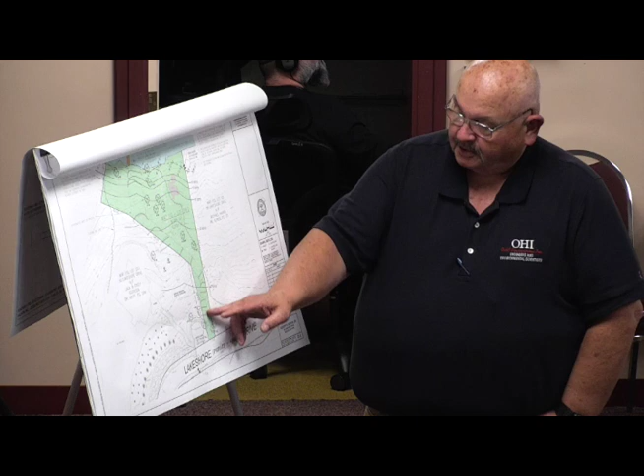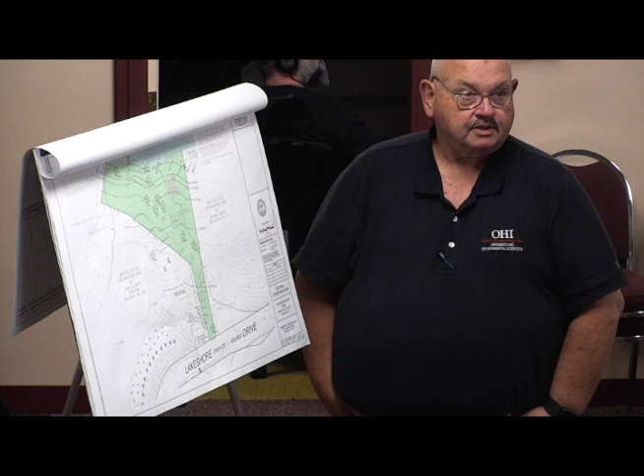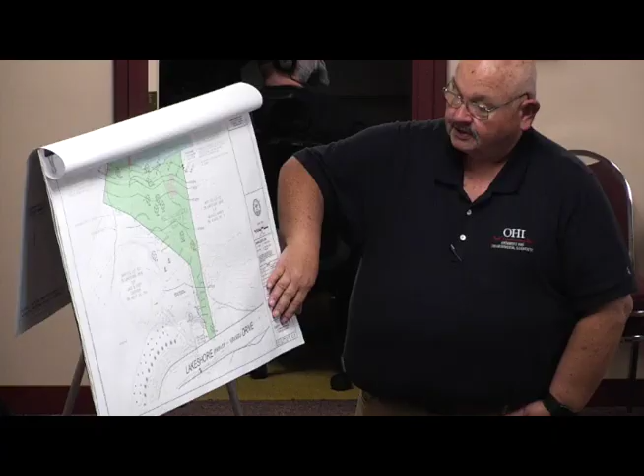The squiggly lines here, those are straw wattles that Mr. Moran had put in to try to slow erosion down. That is the existing condition. The wetland flags here were taken off of the notice of intent plan that was prepared by Gurry and Howland. We did not flag the wetlands. And this topography was taken by us. They're 1-foot contours. The previous was 2 by Gurry and Howland when they did the notice of intent plan for Mr. Goodison. But a surveyor used a scanning device to do the topography, because that would give us a more accurate representation of the ground conditions, especially when you get into nitpicking on how water flows.

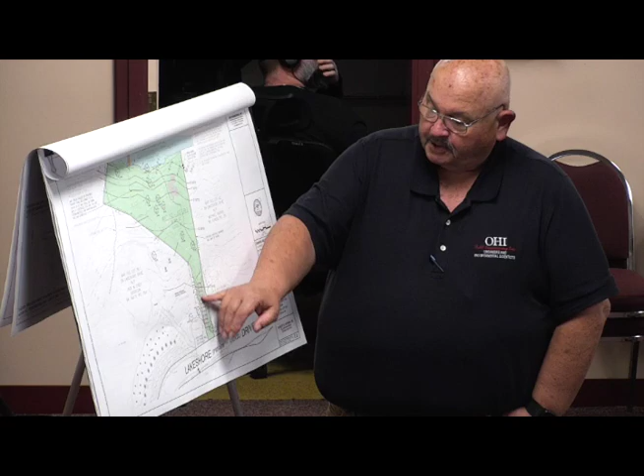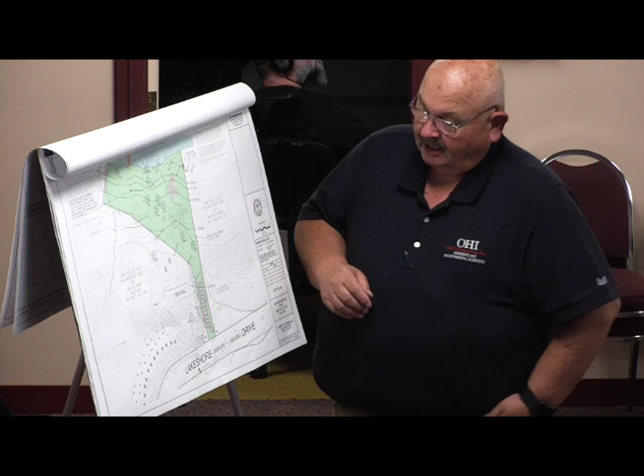So the first drawing is the EC plan. The second one is the site plan showing the proposed restoration. And what we're intending to do is to use a product on the slope here. Turf stone, thank you very much. But I'm old, so I have an excuse. Turf stone is a block, it's 3 inches thick, they run about 16 and a half inches wide, 24 inches long, and they're like a waffle. They have voids in them. And these blocks, you can interlay them with each other to make the roadway. They can either be filled with crushed stone, or you can fill them with loam and seed, and you can mow them like a lawn if you want to, but the point is they're permeable.

They also sit on a bed of stone, and on a slope like this, whether you use angle iron or a little bit of a poured concrete stop here, they recommend a stop when you're on the downhill side of the ramp to keep the thing from moving. I can't see how it would, but, so this starts right here at the edge of the road. This is 40 feet long. It just gets into the 100-foot buffer here by about 5 feet, 4 feet. And then the land flattens out.

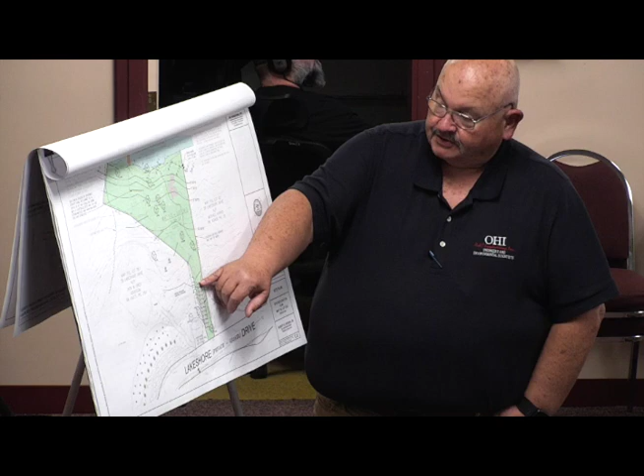Now, Mr. Moran bought all these straw wattles, so what we wanted to do in the restoration was, first of all, we understand the lakes will be drawn down in a couple weeks, is that right? Mm-hmm. And it goes down about, Brandon Phantom told me it goes down about 4 feet. That's the time to remove the material that's in the pond. And I have an outline of that right here, if you can see that on your plans. Yes. So what we proposed is, with the ponds down, remove that material, stockpile it somewhere on the site, and then surround it with some kind of a silt area so that nothing can get washed in a subsequent rain event.

Unfortunately, this is the wrong time of year to try to stabilize a site. No one's going to get out there and get this work done in time to grow any kind of grass or anything, so I think it's going to have to wait till spring. I would suggest that. I told my client I didn't think anyone could do it any sooner.

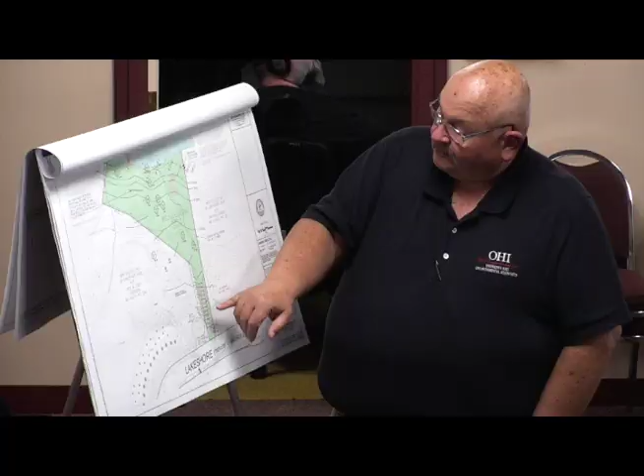But I also have on here, starting at the 100-foot buffer, right here, we have a dash line coming down the property, running over to here, across the pond, in and out of the wetland flags, and then back up here, outside of the 100-foot buffer again.

We proposed mulch wattles. They work a lot better than straw. When they're wet, they settle right down on the ground, you stake them in. Not much gets by them. It would offer a lot more protection to the pond than the straw wattles would, or even hay bales, I think.

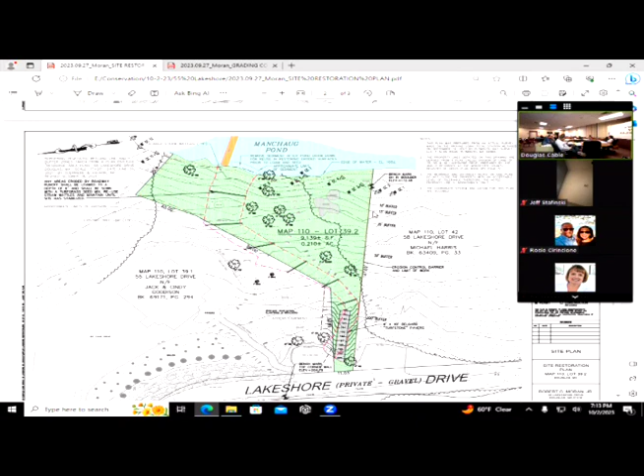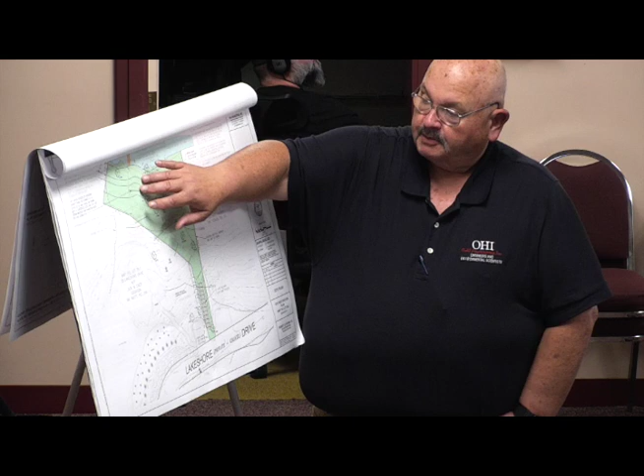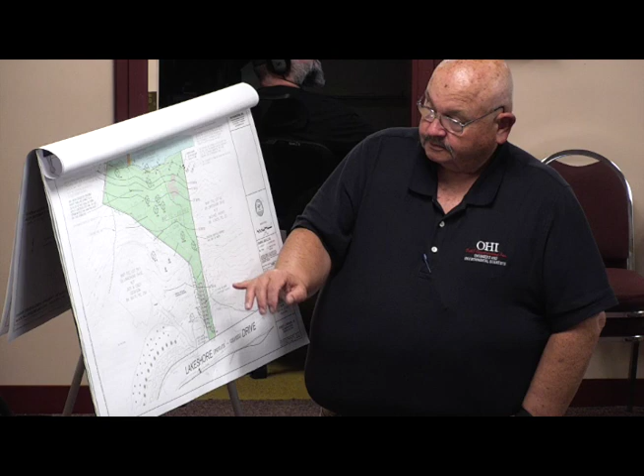I'm assuming in the spring, when we can work with the grass, the stockpiled material, we could reuse that material to restore. There's ruts in the driveway area coming down here, and there's just material missing throughout here. That material could be spread, be loamed over and seeded, and could reestablish the lawn that was there.

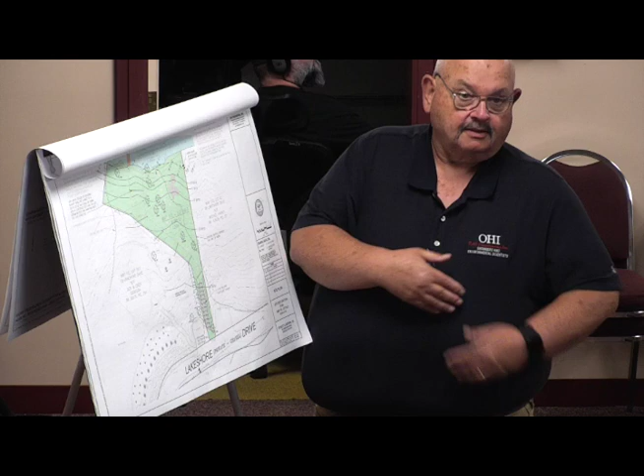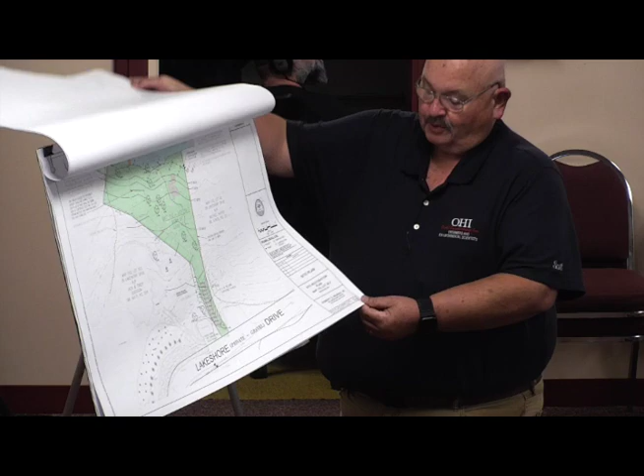Unfortunately, none of this is going to work until we solve the problem with the water, because no matter what we do, if the water keeps coming down, it's going to continue to wash away. There's one more sheet. I don't know if there's a need to talk about it. It's just standard. Do you have a construction sequence somewhere on the site? A construction sequence? There is a construction sequence on there. It's a general one that we use.

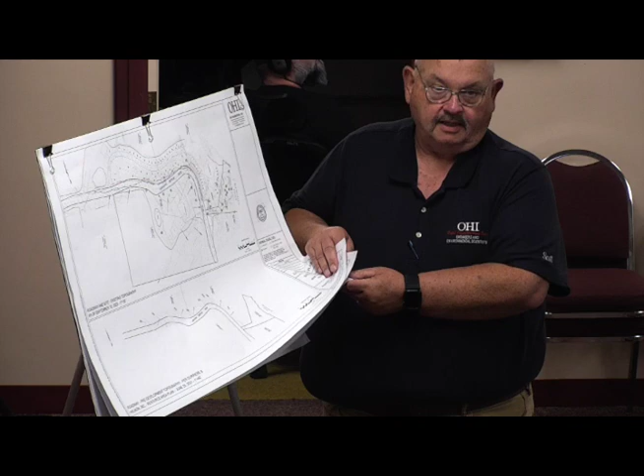Now, there's not a notice of intent or anything here. Is this something you can still condition as a commission? Yes. Okay, that's good. Within that enforcement order. Yes. All right, this plan.

Top view is Lakeshore Drive. This is Mr. Moran's property. This one, I believe, is still owned by Mr. Cahill. This is Mr. Goodson's property, all the way up to here. This is the result of the survey that we had done. There's 1-foot contours that we generated, in an effort to show the actual path of the water flow within the roadway, and that's the blue line. The red line, you can call it a top of berm, you can call it a drainage divide if you like, but the water doesn't get past that red line, stays on this side of the berm.

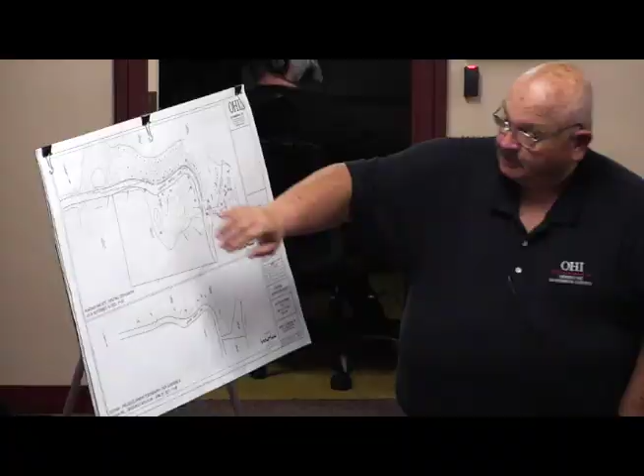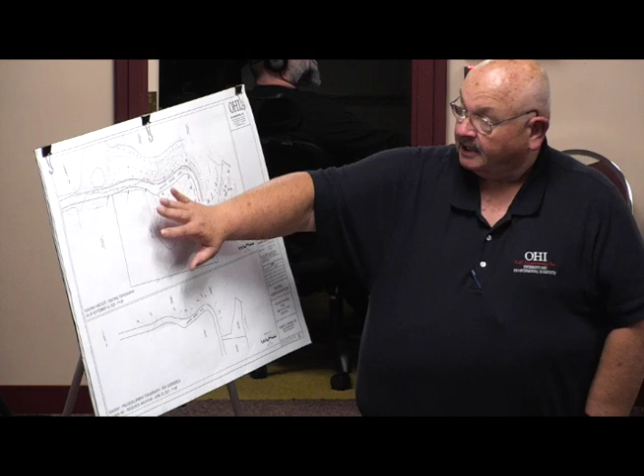So Mr. Moran's property ends here. This lot, I believe, was cleared. I think there's a void of trees here. Anything from this red line going this way in the roadway appears to come down the road and go this way. Okay? Everything from this property here coming down, even above Mr. Moran's property and Mr. Moran's property, all contributes to the roadway, and they have these drainage flow arrows on here.

There is a divide on Mr. Moran's property where the water goes elsewhere, but here it goes toward the road all along the property. There is a substantial amount of upland area that contributes to this. Beyond Mr. Moran's lot, it's probably something like this. It's huge. Because of the berm, the water runs to the roadway, it's channelized, and the further it goes downhill, the more it picks up in speed, volume and intensity.

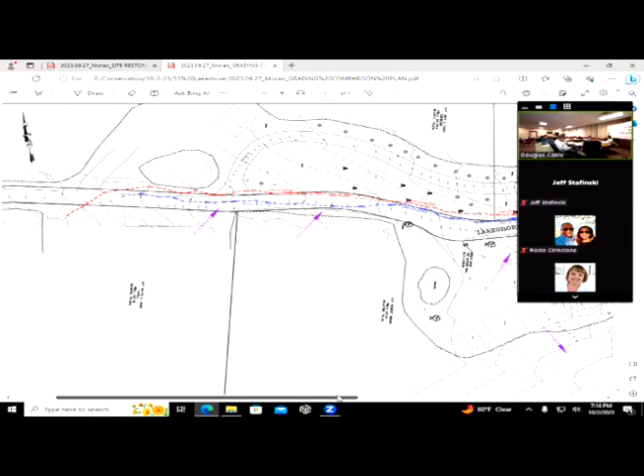And in the lesser storms, it would come down this far, it would turn and go through Mr. Goodison's property where the hay bales are by his little fence where his parking area is. And something of a little more intensity, it would go a little further and come down Mr. Moran's access way to his lot. There's no other way I can explain it. The berm is what's channelizing the water, causing it to get to this point to create that erosive action.

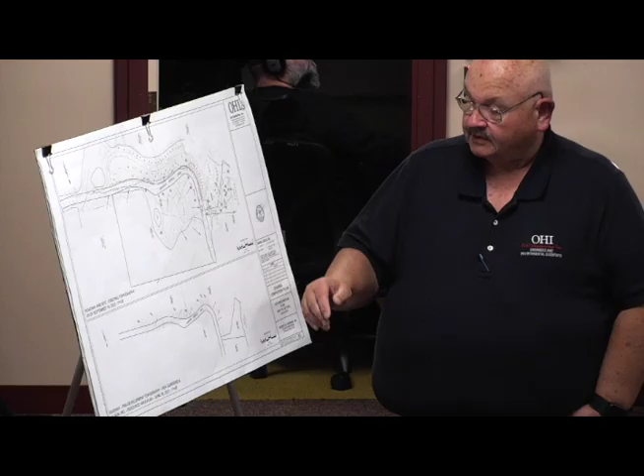Now, none of this water comes from Mr. Goodison's property, not a drop of it. Everything from this road goes this way. This topo was done by Gurriere and Hallman, again, for the notice of intent plan. We traced the 2-foot contours, and before the berm was built, you can see where the roadway had graded off, the runoff had gone off the roadway. And this was originally a wood lot, I believe, before it was cleared. I think it was all wood, was it not?

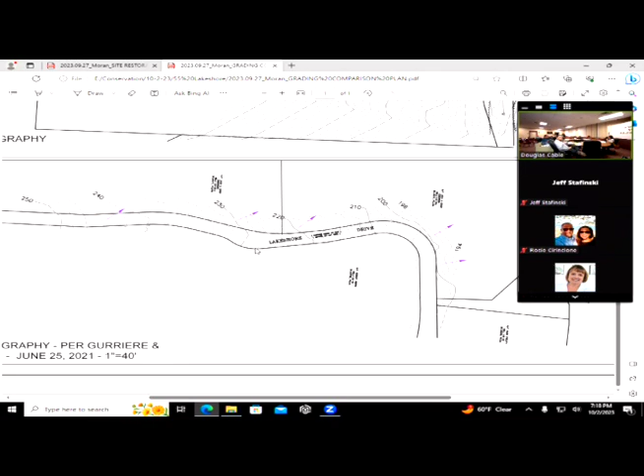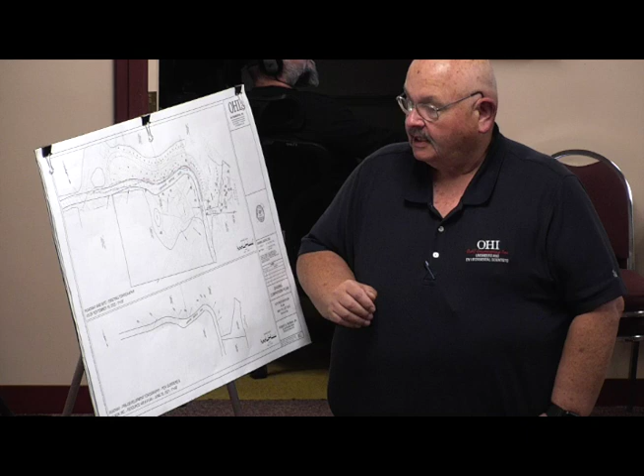So there was no channelizing, there was no rerouting of the water, putting it to a single point of discharge. So there was no erosive action. When the berm was built, it stopped that flow. Now, that's not intentional, it just happens to be the product of putting the berm in. That was not meant to cause anyone any problems. Of course, the point is to try to find a solution to stop the water from doing what it does.

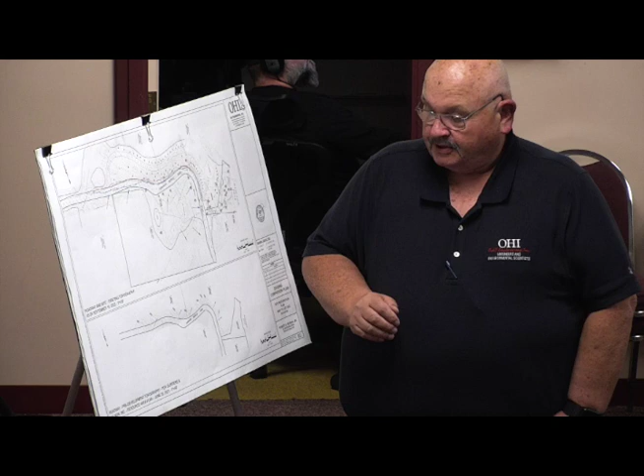So we've had conversations with Mr. Goodison, and Mr. Goodison has already, even before I knew it, cut 3 points through the berm. If you remember from the as-built that Gurriere and Hallman did, he had put in culverts under this driveway with areas with stone that would collect water. The inlet of these pipes, I think 3 were proposed, but he built 4. And what he'd done, he cut the berm here, and out here.

And in the last couple rain events, the water coming down the road did go through those cuts. He wanted to see if these drains, which are all 12-inch drains, would take that flow. And apparently they did. I'm not saying it's a solution, it was an experiment. Mr. Goodison is more than willing to try to help fix this situation. So I know we want to find a resolution to this. I'm going to suggest that

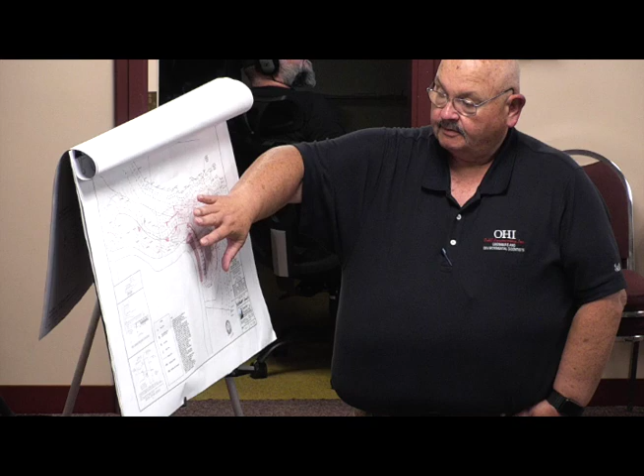between Mr. Moran's restoration and the attempts here, Mr. Goodison tried this. We know there have to be enhancements to the cuts, so they don't erode further and so forth. Maybe some piping, maybe some stone. But we would like to ask the commission if you would entertain the idea of letting us try to work on that, see if it continues to work, and then report back to the commission in a certain amount of time, to say whether it's working or not, or if we have to make other modifications.

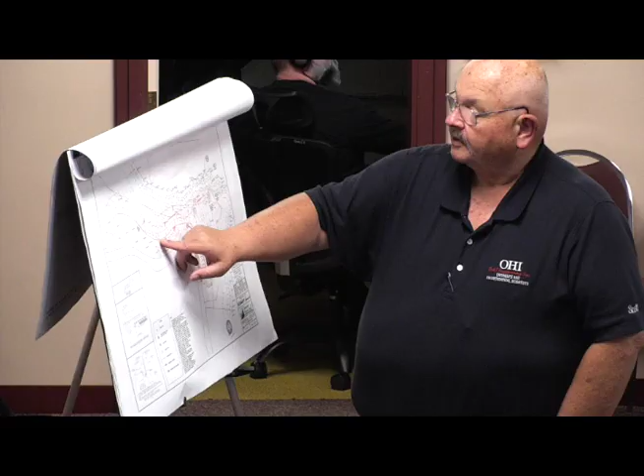Not all areas of work are within the jurisdiction of the Conservation Commission. This one probably is. That's the one. This one right here, this is the southern buffer coming through. The 2 of these would not, this one is. We don't have that plan, do we? You should have it from Gurriere and Hallman that submitted it with the request for a certificate of compliance. Yeah, okay. Do we have it in our packet? I just have it on the screen. I found it.

Could you zoom in for me? Sure. So this is number 56? Yep, 56, right on the hard corner of the roadway. 56 Lakeshore. And then we did planting. See, this B line is the buffer. And from the as-built, when we issued the certificate of compliance, have there been modifications to this area? Only just recently, the 3 cuts that Mr. Goodison made to try to reroute the stormwater from going where it was going.

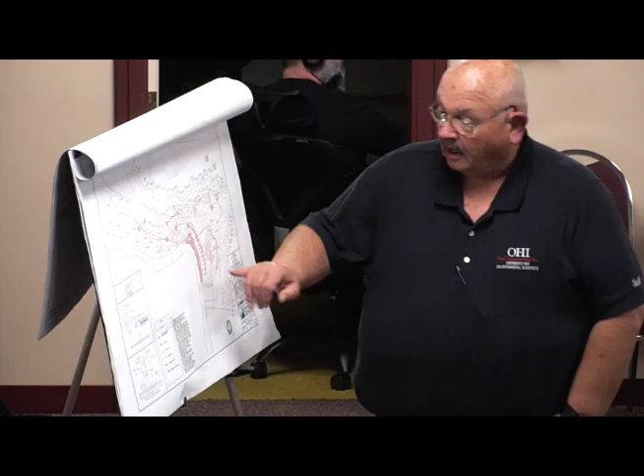And could you point on your plan where the jurisdictional point is? Could you point to the plan where what you're planning is jurisdictional? Tell me if I'm wrong, please, because you know this better than I do, because I haven't even seen it. I believe there's one right here, which goes down to this. It was my understanding that they were all outside of the buffer. On the berm, all the ones you did? Yeah. Okay, so maybe you did this one.

Okay, I'm sorry. Yep, just through the chair, if you could speak with me, because I need to recognize the audience member. That's okay. That's all right, it's just for the minute taker.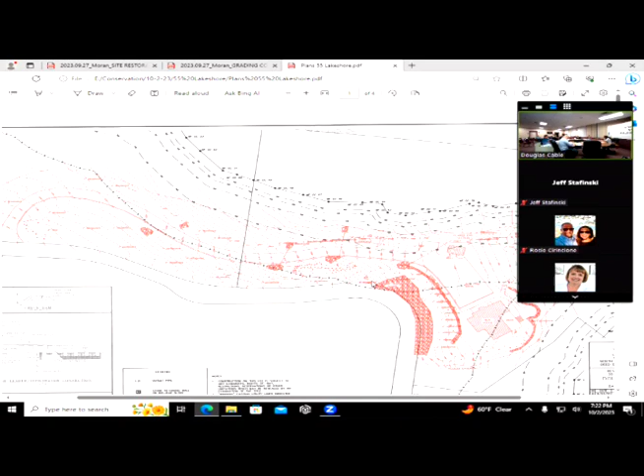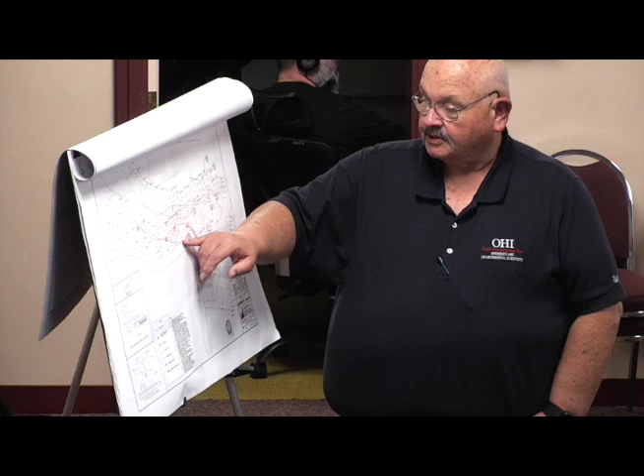So you're requesting the board to allow you to do work between the 100 and the 80-foot buffer? I can't see from here where your jurisdictional activity is. This is a 20 scale plan. This 100-foot buffer is 5 feet or so from the edge of the roadway. That's the line. You're probably 5 feet into the 100-foot buffer. 5 feet? That cut, yes.

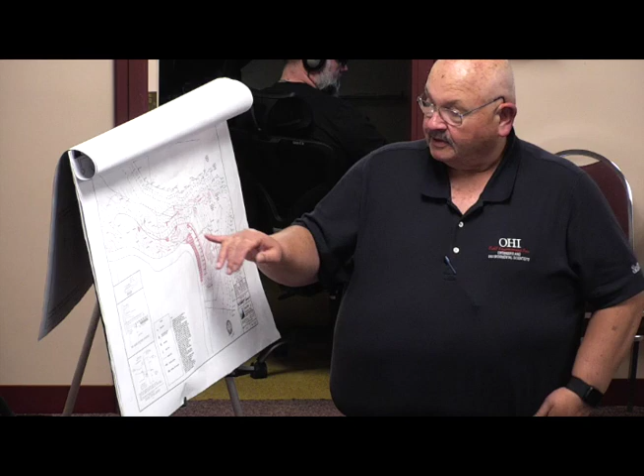Okay, thank you. But the others are outside. Okay, but again, Mr. Goodison did it trying to be the good guy, to see if it would help. He wanted to make sure that his system within his parcel was capable of taking that water, and apparently it didn't work. Okay. Thank you. It's not going to solve all of the water flow. Just one more point here. Mr.

Moran has a pipe that contributes to the roadway that existed before he bought the house, where surface runoff from his driveway goes into it. His roof drains dump onto the ground, they drain across the driveway and go into it, and that does contribute to the road as well. Mr. Moran is

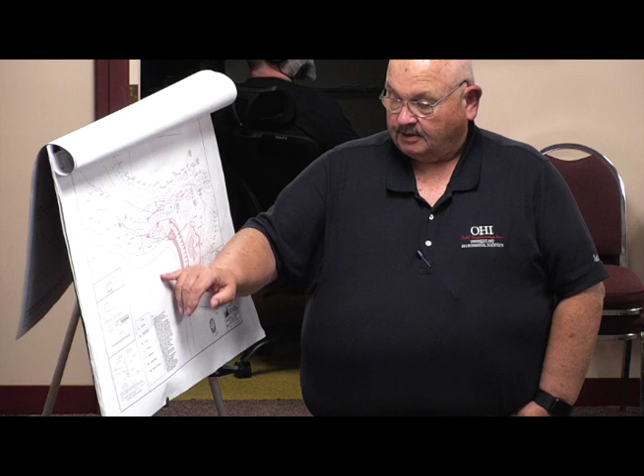willing to put in a recharge pit under his driveway, like a concrete beehive surrounded by stone, a dry well. If you put the driveway and the roof runoff into that, it would probably alleviate a lot of the flow to the roadway, at least to a point where in the beginning of the storm it'll take a decent volume from his house, put it underground, and by the time the storm's closer to being over, it wouldn't have such an impact on the flow to the roadway.

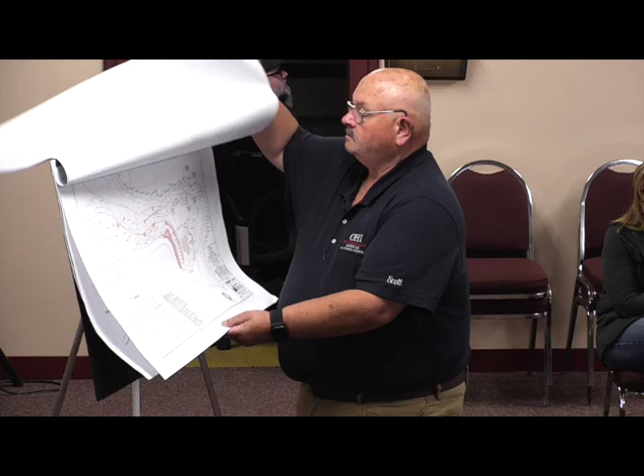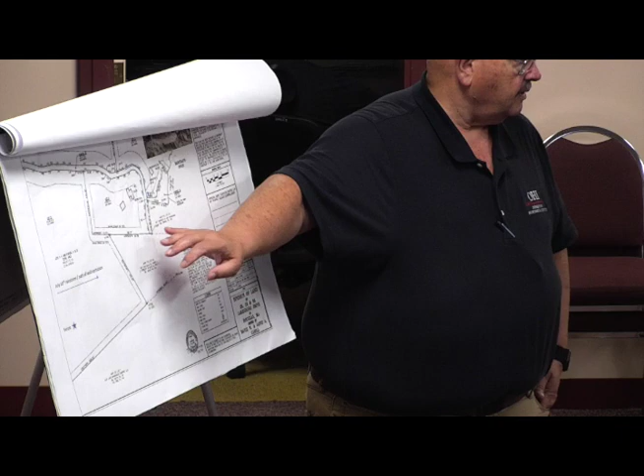Okay, and could you point to the location of the dry well that you're proposing? We haven't put it on paper, so I can show you where we want to. You could hand sketch it. Because we've already given his certificate of compliance. Probably about 10 feet away from the dogwood tree that you have there. So it's on the bottom of your driveway? No, it's within the grass area? You want to come point to where the pipe is? You know better than I. And name and address, please. Robert Moran, 55 Lakeshore Drive.

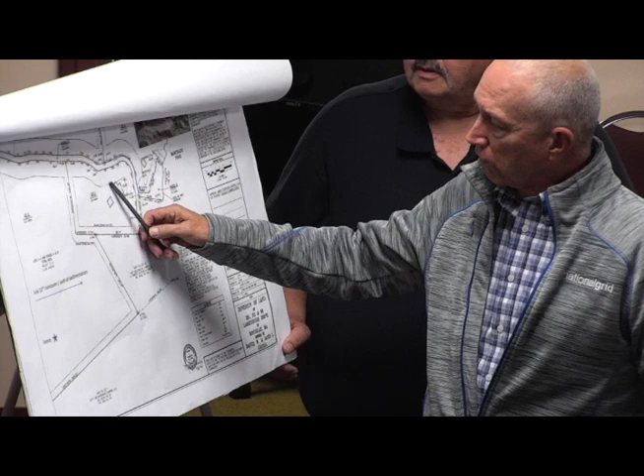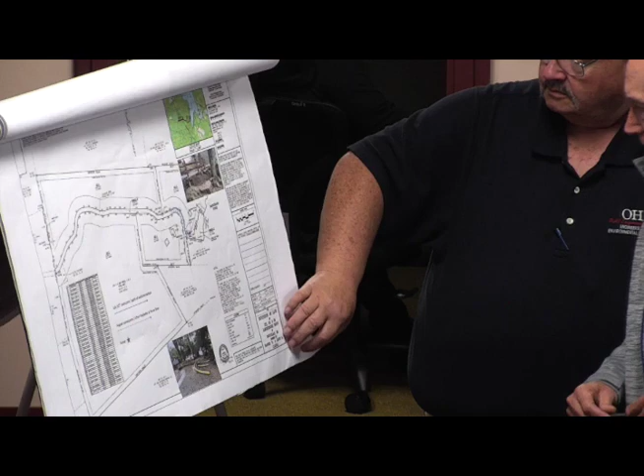So there is a pipe that is outside the driveway area, and the roof drain actually goes forward. It is sort of a catch for the sheet flow of the driveway, and it collects and distributes out here, close to the road, maybe 10 or 15 feet from the road. Yep. And I think on one of the plans it shows a tree, so it's probably 10 feet away from the tree on the existing conditions plan. Will it be outside the drip edge of the tree? Yeah, actually, it's close to where it says 50.5 with the arrow. I don't know if you have that same plan.

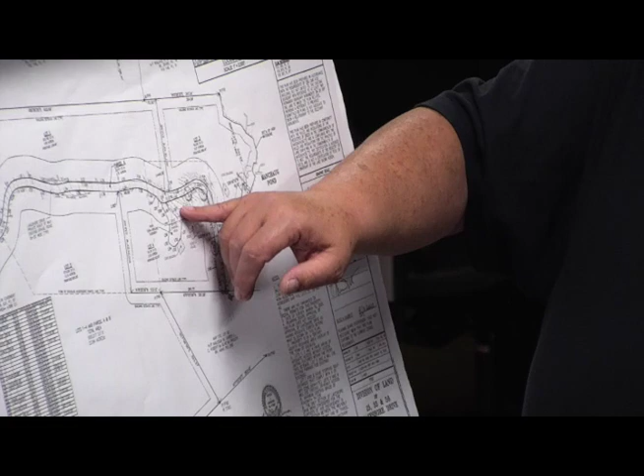You wouldn't have this plan? No. It's just outside the driveway, right in this area right here. The driveway pitches toward it. The roof drains could be tied into it. Is it jurisdictional? It's outside of the jurisdiction. It's definitely outside. Okay. So we can authorize 100% the install of the dry well for the roof and the driveway runoff. That's no problem. Can do that.

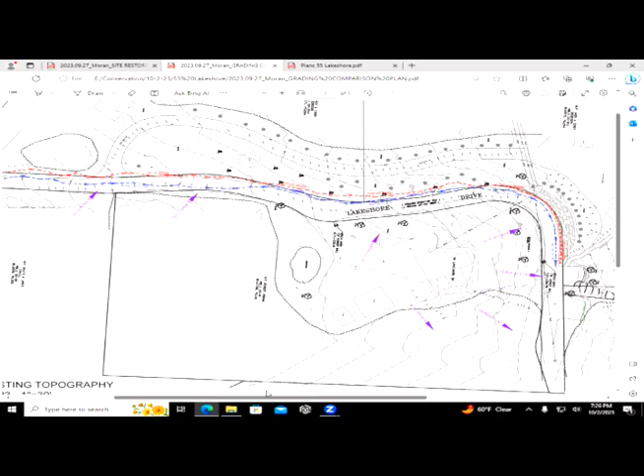Board, how are you feeling about the alteration of that berm within 5 feet of the 100-foot buffer? Is that agreeable? I think it is. I do too. That's reasonable. Just for the record, you didn't have a list of your proposed activities, so you're pretty much asking us on the fly. So we've got the one berm that's within the jurisdictional area. By consensus, we'll authorize that alteration within the 100-foot buffer, also in accordance with the restoration plan required from the enforcement order. The dry wells, you're at your leisure to do. They're outside.

And as far as the activity that's happened on the roadway, the last rain, how did it fare? Was it still flowing? Was there still movement of large rock riprap? Okay, in a second. Board, do we have any questions or comments? How are they going to stabilize that area over the winter? Are you going to do anything to it? Well, we'll get to that in a second.

So you're proposing to hold and not to stabilize? In fall time, we would think grass can grow if you hydroseed it. Well, I believe the deadline for grass growing is like October 12th or 14th. You can plant after that, but you're not assured it's going to take. It's just too late in the year for the seed to germinate. That's the landscapers telling me that. So we would have to postpone that issue of stabilization.

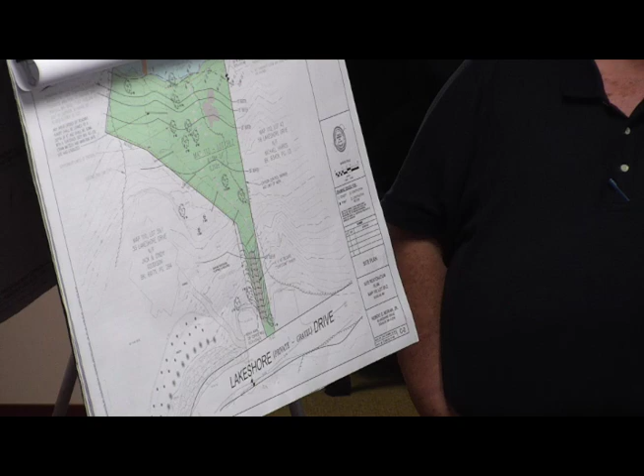Anything else? No. There's nothing I can do for the other water that comes down from the roadway beyond us. There's other water that contributes, what comes across all this land, including ours, to contribute to this. I can't create a solution for that. Okay. Mr. Benoit? Thanks, Madam Chair.

I did get an opportunity to visit the site on Friday during a heavy rain event. And I did notice the cuts in the berm, and I drove to the bottom of the hill to see how that was functioning. In the past storms, the engineer is absolutely right. There's nowhere for the water to go. It horseshoes right around that corner and goes right down the lot in question. Due to the cuts, and I know that they're temporary, that took a great deal of the flow away from the troubled area. I think both parties working together is a really great asset to get this resolved.

And I think that these cuts and whatever you learn in your work in the next couple of weeks might provide some resolution here. So I'm actually quite pleased to see the initiative that Mr. Goodison took, even though experimental, it did seem to prevent an erosion issue in that rain event alone. I was happy to see that. Okay, thank you. I'll stay here in case you have any questions. I think the board's good, right? Yeah. Or anybody else?